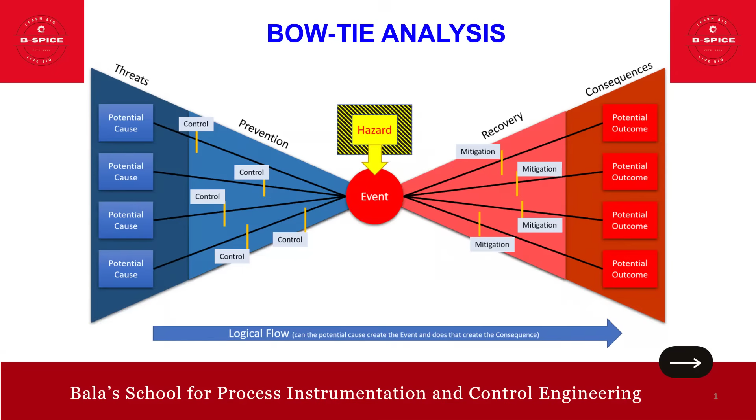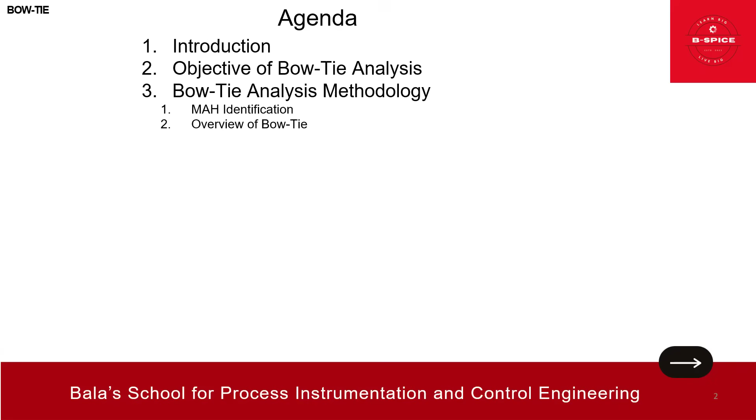I'm going to talk in this session on the basic concept, friends. Basic concept in the sense we'll talk about the intro, the objective, and the analysis methodology, under which we'll talk about the MAH identification. Then we will talk about the overview of the bow tie. MAH in the sense it's a major accident hazard. Then we have the key elements to consider while developing the bow tie. What are all the key elements we should focus on?

Under which we have hazards, top event and consequence, threat, barrier, prevention and mitigation, and of course the escalation factor and escalation factor control, bow tie workshop team, all these. Then the steps for execution of development of the bow tie. What are all the steps involved? Then finally the report and the conclusion. These are the topics for this session.

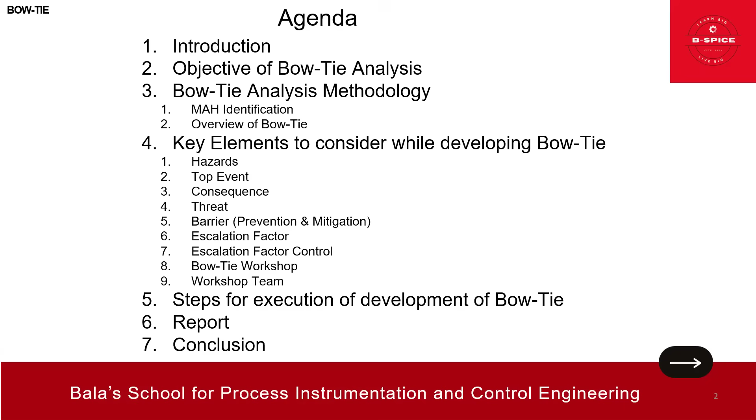Okay, friends, let's go into the details. This is basically an example. This is how it looks, as I explained earlier. So this is more of an intro. So bow tie analysis is to provide a holistic overview, right, of how each major accident hazard scenario is managed, and also to propose recommendations for identified inadequacies. So these are all the causes, this is your control, and this is your major event, that is about the water quality. Then you have an outcome, basically public health, and the bromate control, all this mitigation.

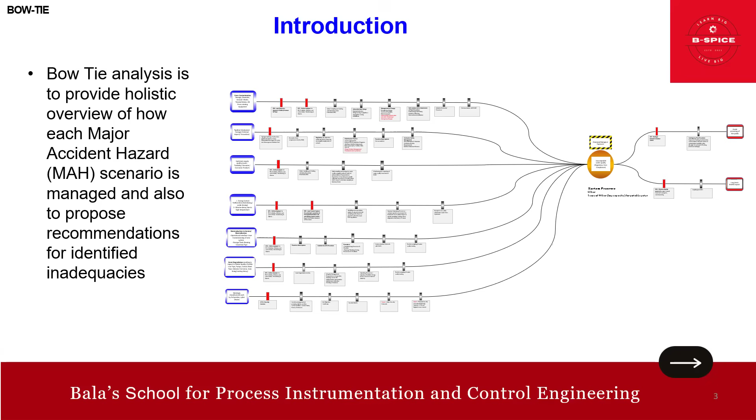Okay, friends, so this is how the bow tie analysis is carried out. We will be talking only on the concept. So you can make use of this concept and attend the workshop, right, for you to understand more. Now, what is the objective?

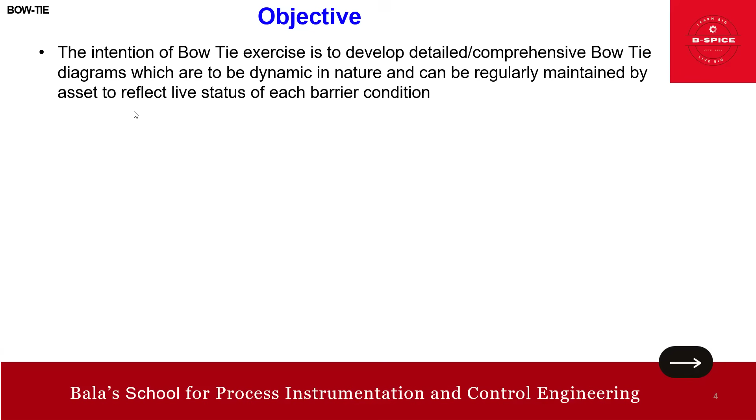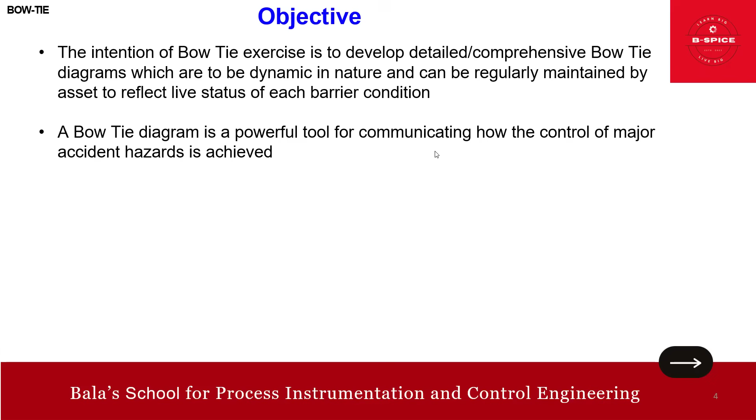The intention of the bow tie exercise is to develop detailed, comprehensive bow tie diagrams, similar to what we have seen in the previous slide, which are to be dynamic in nature and can be regularly maintained by the asset to reflect the live status of each barrier condition. This is the objective. A bow tie diagram is a powerful tool for communicating how the control of major accident hazards is achieved.

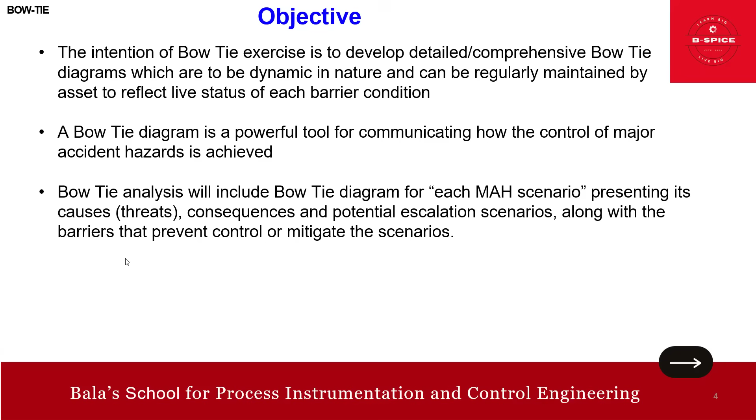So bow tie analysis will include a bow tie diagram for each MAH, major accident hazard, scenario, presenting its causes, that is the threats, consequences, and potential escalation scenarios, along with the barriers that prevent, control or mitigate the scenario. That's it, friends. That is the objective.

Now we go into the, yeah, I think a few more objectives. Yes, the barriers shall be further analyzed for their defeat mechanisms, called escalation factors, and corresponding measures provided to overcome the barrier defeat mechanism.

We call it as escalation factor control. You got it, friends? So the barriers are further analyzed for their defeat mechanism. We call it as escalation factor, and corresponding measures provided to overcome the barrier defeat mechanism are called escalation factor controls. So the MAH scenario shall encompass both process MAH and other MAH applicable to the facility.

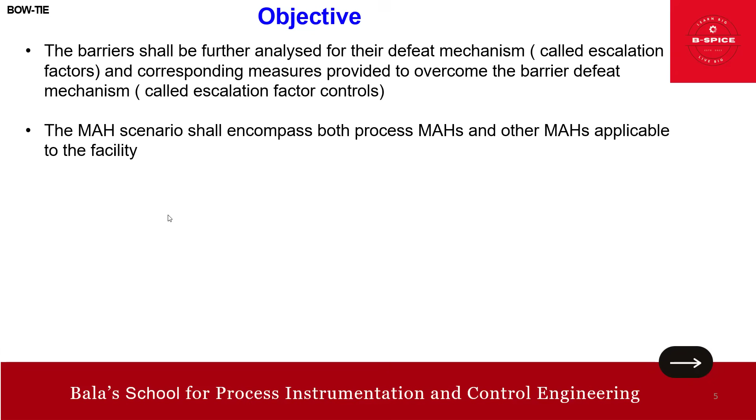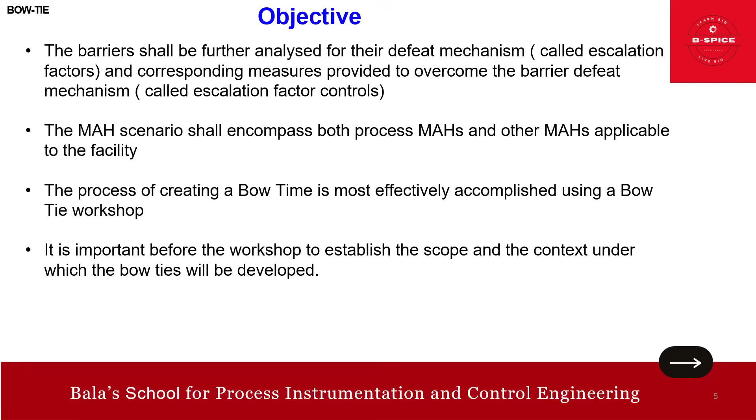So the process of creating a bow tie is most effectively accomplished using a bow tie workshop, right? So it is important before the workshop to establish the scope and the context under which the bow tie will be developed. That's it. That's the objective. Okay. Now we go into the methodology.

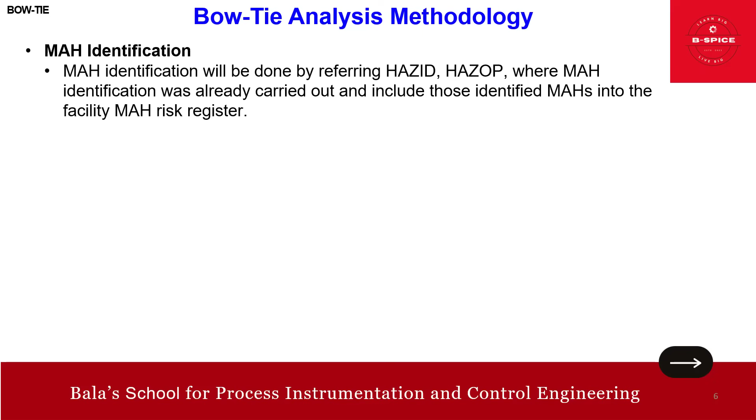Okay. So as I said, MAH identification. So MAH identification will be done by referring to the hazard study where MAH identification was already carried out, and include those identified MAH into the facility MAH risk register. So before this, we would have already conducted the hazard studies, all these, right? So there we would have identified this MAH, okay? So MAH means what? Major accident hazard. So those things we need to include in the MAH risk register, okay? So that is the methodology. That is the first methodology.

Then second is, what is the overview basically? I want to give you the overview, okay? See, the general focus of bow tie is managing major accident hazards, as working personnel need to understand how these may occur and the barriers and escalation factor controls deployed to prevent them. So the general focus of bow tie is managing the MAH, major accident hazards.

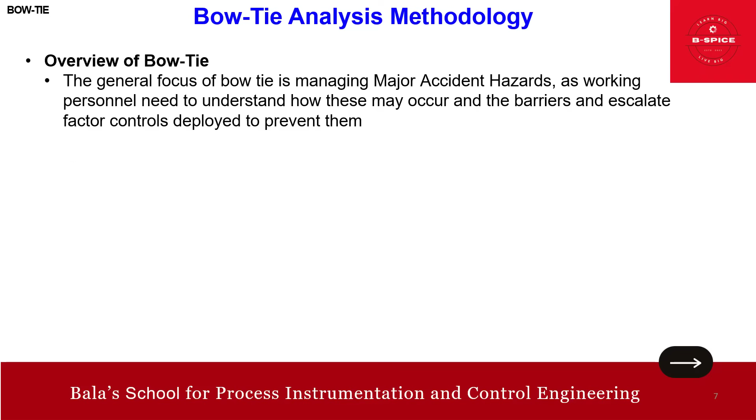So for this, a bow tie diagram shall be developed for a unit level or equipment specific MAH scenario. So a bow tie diagram shall be prepared for one MAH scenario, major accident hazard scenario, presenting its causes, consequences, potential escalation scenario, along with barriers that prevent, detect, control, or mitigate the scenario. So this is what I explained in the first slide, in fact, right? So all this has to be in the bow tie diagram.

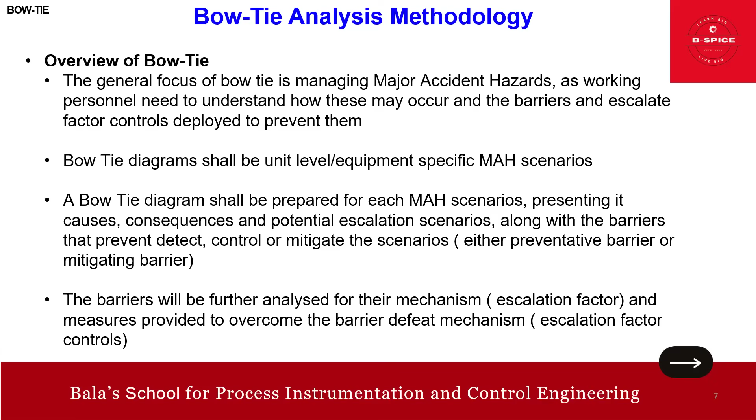So again, the barriers will be further analyzed for their defeat mechanism, escalation factor, and measures provided to overcome the barrier defeat mechanism, escalation factor controls. So this is about the overview of the bow tie. Okay, I hope it's clear. Now we focus on the key elements to consider while developing the bow tie.

One is the hazard, right? So here hazard refers to an operation, activity, or material that possesses the potential to cause harm, right? The hazard plays a crucial role in delineating the extent of the entire bow tie, right? So hazards that are too general can result in a generic bow tie, which is why it is important to identify and address specific hazards. We can't go with the generic. Okay. So the practice is known to enhance the value as it elevates the level of intricacy in the remaining part of the bow tie.

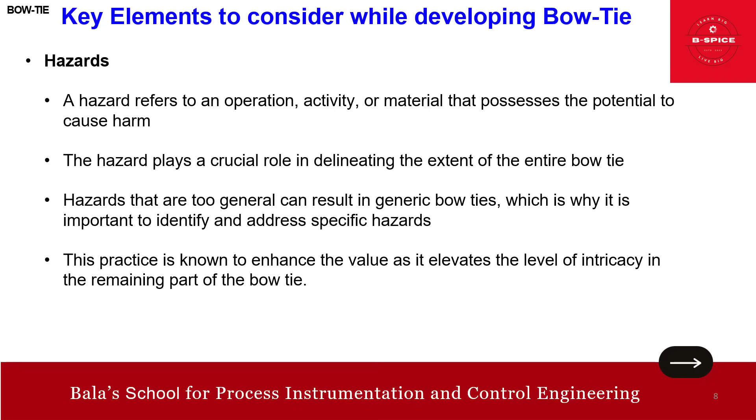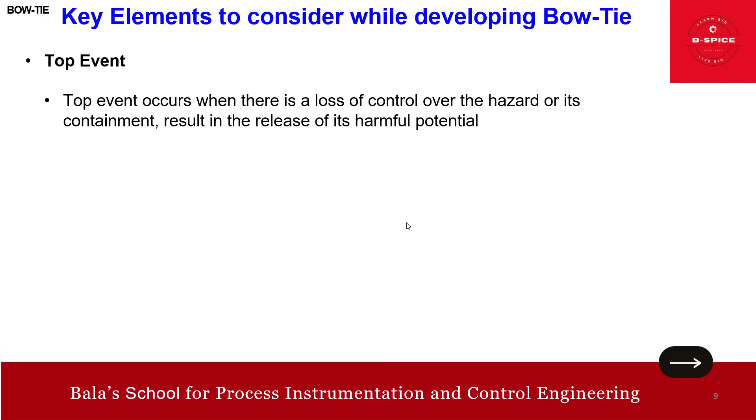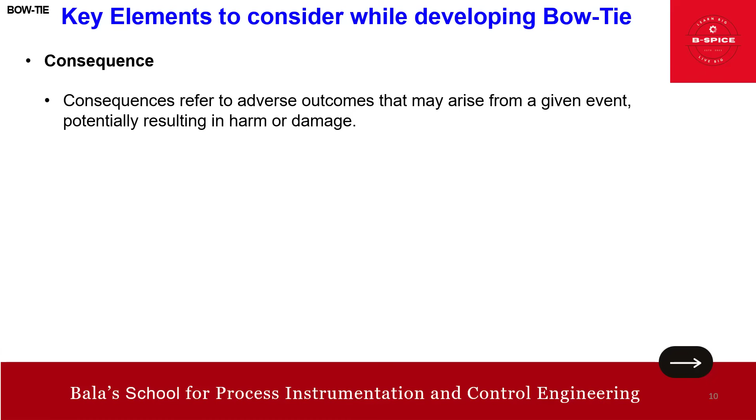Then another key element is a consequence. Here, consequence refers to an adverse outcome, that is, causing a public health issue, right? In my example. So that may arise from a given event, potentially causing harm or damage, right? Then another element is threat. Threats have the potential to cause a loss of control over a hazard, which can ultimately result in the occurrence of the top event. Okay.

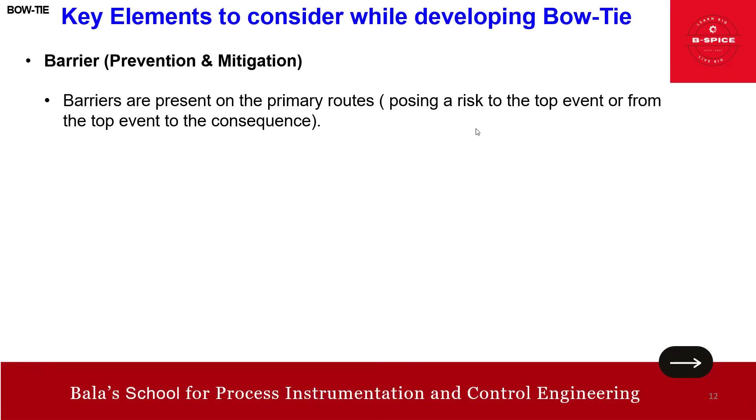Right. Then we have another element, barrier. This is to prevent and mitigate. So barriers are present on the primary route, from the threat to the top event or from the top event to the consequence. So barriers must have the capability on their own to prevent or mitigate a bow tie sequence and meet all the rule set validity requirements for a barrier to be effective, independent, and auditable. See, I'm not giving any specific example because my intent is to update you with the concept, friends. If required, we will have one more session with the example.

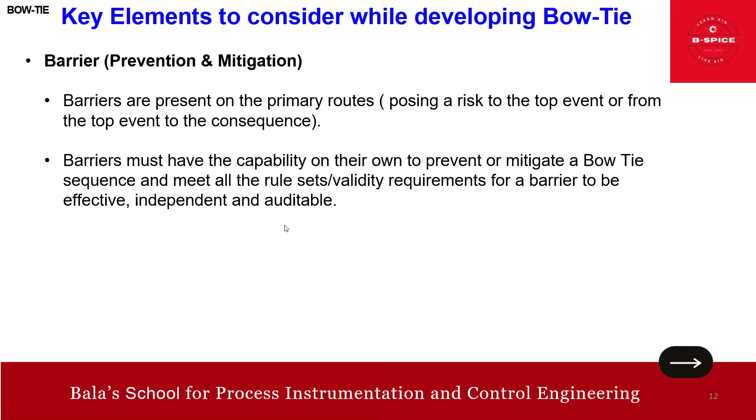See, just for the sake of it here, what are all the barriers? In my case, see, I said I have a problem with the water quality issue. So I have a barrier in terms of online analyzer, right? And also I have additional protection in terms of water sampling and testing, right? So all these are there. That is what I am actually meaning here. Okay. And it has to be independent. Okay. Right. Then another element is escalation factor. An escalation factor can apply to barriers on either side of the bow tie diagram.

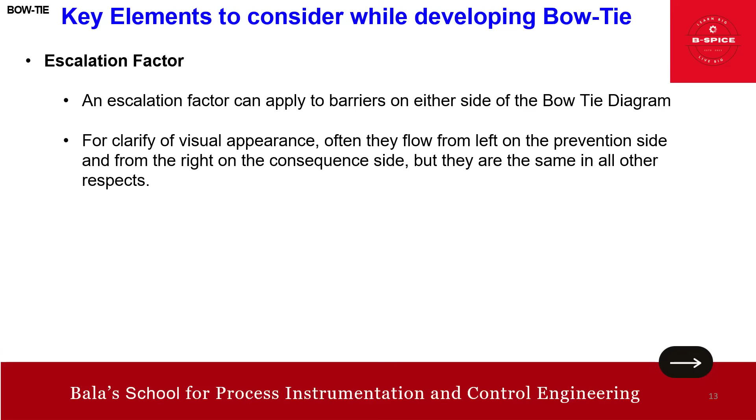As you have seen, both sides you have this, right? Then for clarity of visual appearance, often they flow from left on the prevention side and from the right on the consequence side. Just go back and visualize the previous slides, friends. So left on the prevention side, and right on the consequence side. But they're all the same in all other respects, actually. You got it, friends?

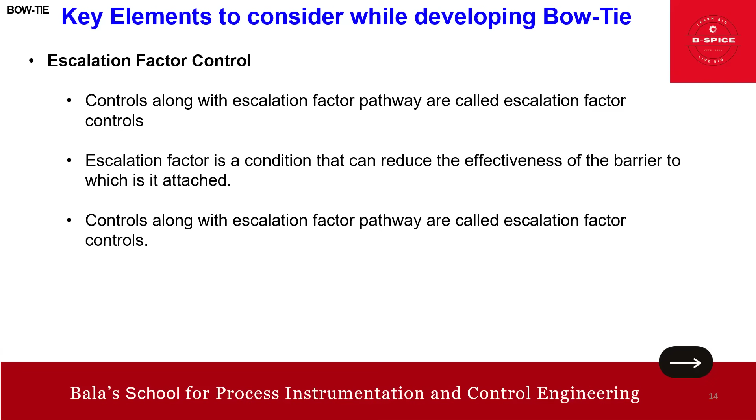Okay, then escalation factor control. Controls along the escalation factor pathway are called escalation factor controls. An escalation factor is a condition that reduces the effectiveness of the barrier to which it is attached. So this is one of the points. Then we go into the bow tie workshop.

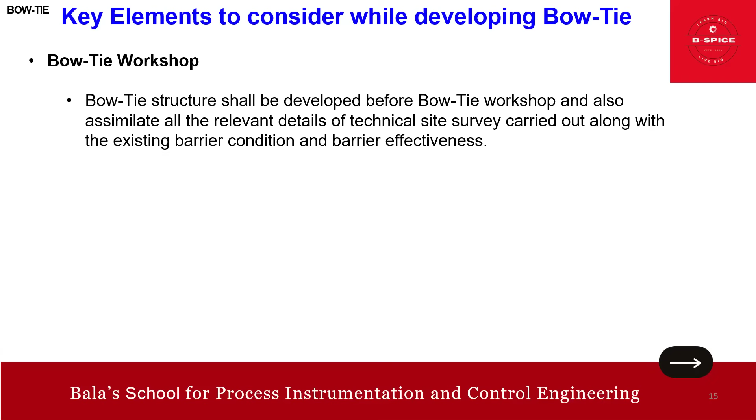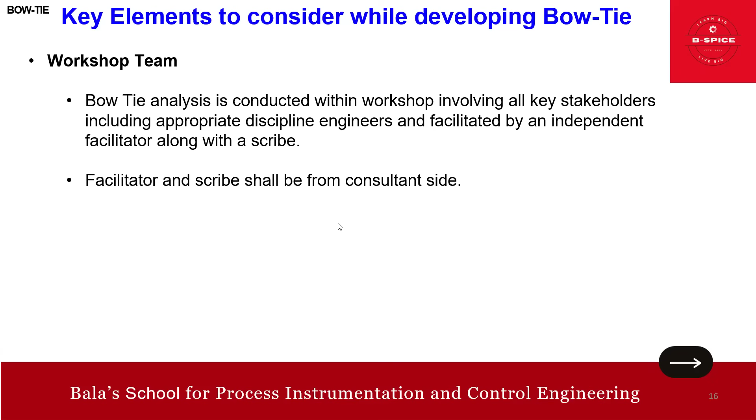The bow tie structure shall be developed before the bow tie workshop, and all the relevant details of the technical site survey, along with the existing barrier effectiveness, have to be detailed out before the workshop. Then the workshop team. The bow tie analysis is conducted within a workshop involving all key stakeholders, like what we do for HAZOP, including appropriate discipline engineers, facilitated by an independent facilitator along with the scribe. The facilitator and scribe shall be from the consultant side. So these are the points we need to consider during the bow tie methodology.

Now we go for the execution. First, we have to identify the hazard and top event, which you identify during the hazard study. Then we need to come out with the threat and consequence and also the barriers for each top event. Then identify the preventive barriers. In our case, we have an online analyzer. The threat is a quality issue and the consequence is the water issue, the health problem. Then identify the mitigative barrier.

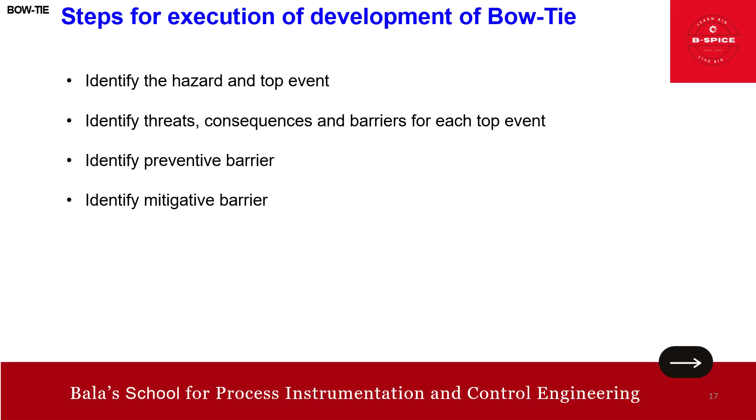So what is your mitigation? In our case, the mitigation is having a chlorine dioxide system, a bromide control system. Then identify the escalation factor and escalation factor controls if anything is there. Then review the bow tie for completeness and quality. If everything is done, then it's all over. These are the steps, friends.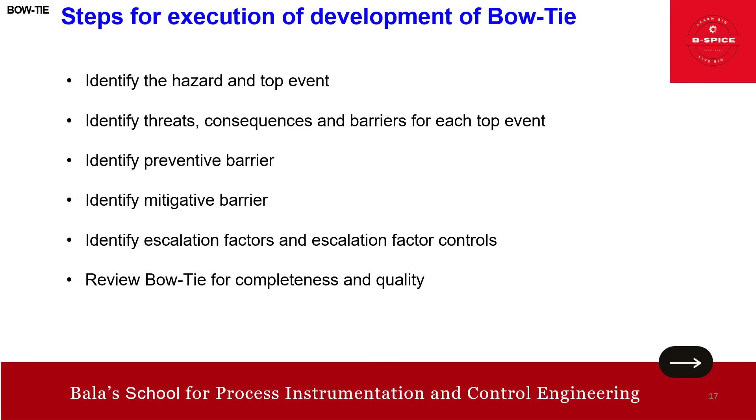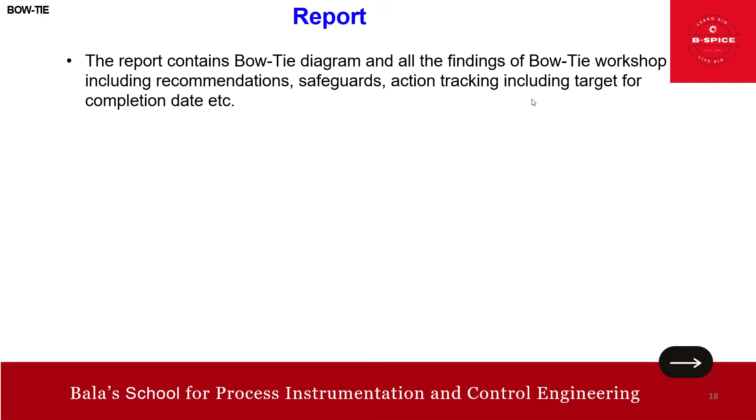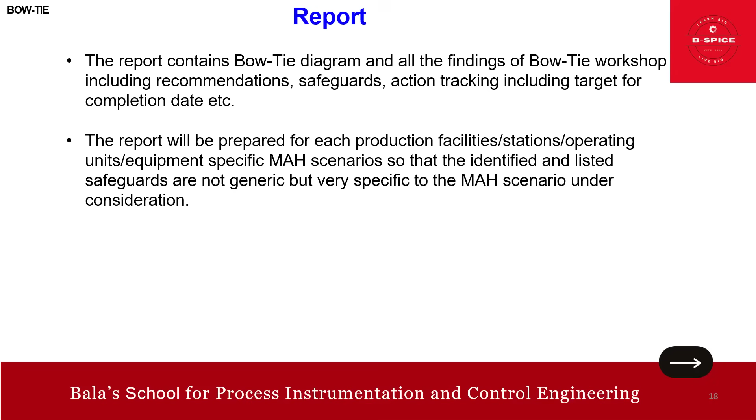Then the report. The report contains the bow tie diagram and all the findings of the bow tie workshop, including recommendations, safeguards, and action tracking, including the target completion date. The report will be prepared for each production facility, station, operating unit, and specific MAH scenario, so that the identified and listed safeguards are not generic but very specific to the MAH scenario. The identified inadequacies and recommendations must be captured.

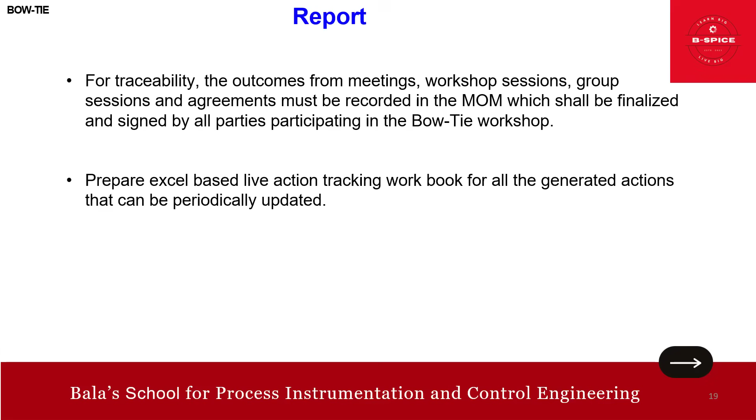Then for traceability, the outcomes from meetings, workshop sessions, group sessions, and agreements must all be recorded in the MOM, finalized and signed by all parties. Prepare an Excel-based live action tracking workbook for all the generated actions that can be periodically updated, and also log any discrepancy noted in the operation, drawings, and technical documents. So this is about the report, friends.

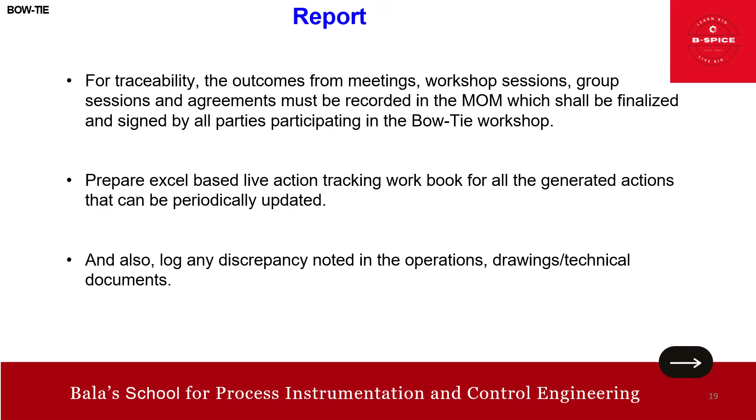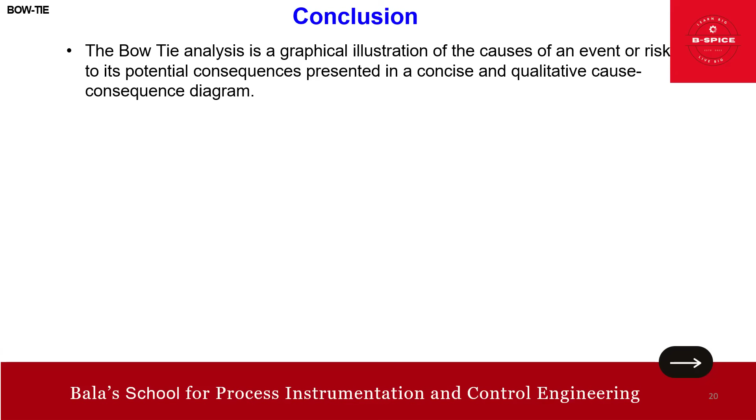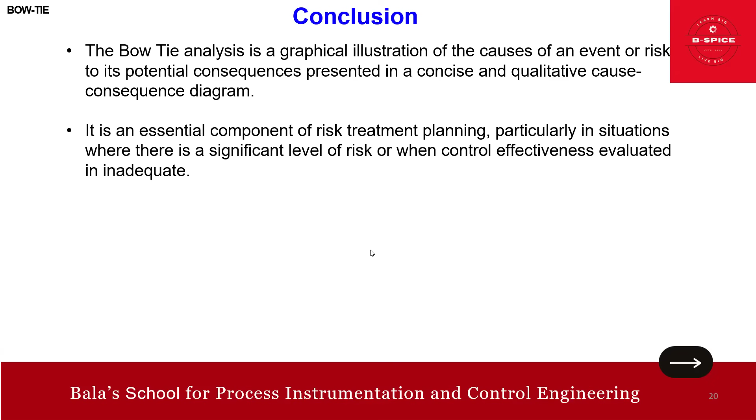Now we conclude. The bow tie analysis is a graphical illustration of the causes of an event or risk to its potential consequences, presented in a concise and qualitative cause-consequence diagram. It's an essential component of risk treatment planning, particularly in situations where there is a significant level of risk or when control effectiveness is evaluated as inadequate. So that's all, friends, I have for this session.

Just to recollect what we covered: we talked about the intro and the objective, then the bow tie analysis methodology, where we talked about MAH identification, an overview of bow tie, and key elements to consider while developing the bow tie, such as hazard, top event, consequence, threat, barrier, escalation, and the bow tie workshop team. Then we talked about the steps for execution of the bow tie development, and finally the report and conclusion. So that's all I have.